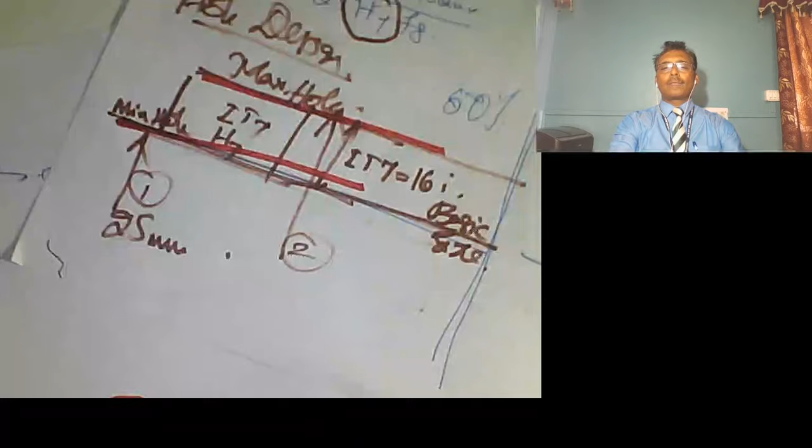I just showcase that. Can you see this? Yeah, look at this. So effortlessly they are moving from one slide, then see on the background they have a PPT. I was always doubting how these people are doing all these lectures.

There are two ways of live streaming lectures, please know this. One is direct live streaming on YouTube, wherein the flexibility is very limited - you can see my video or the presenter's video on full screen. It is quite useful for theoretical subjects where it is only one-way delivery, you don't need a PowerPoint presentation. It is only the discussion of some event, but at any given point of time, if you want to write something, you will get stuck in that.

Otherwise, you will have to go in the layman's way, write something on a sheet and hold it before a camera. It looks thoroughly unprofessional. So I was wondering how these online classes are being conducted. What is the way to do this?

For 7-8 days I worked on that, and this is now the final setup. While giving lectures, I can start working on this. I will discuss all these things whenever I want, come back to the drawing sheet, or go back to my PDF file.

Yeah, can you see this? Then I can showcase. Can you see? Yeah, now look at this. So all this is possible.

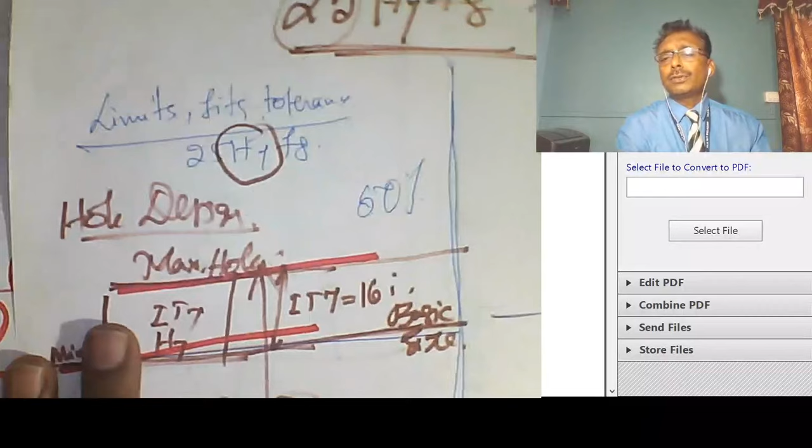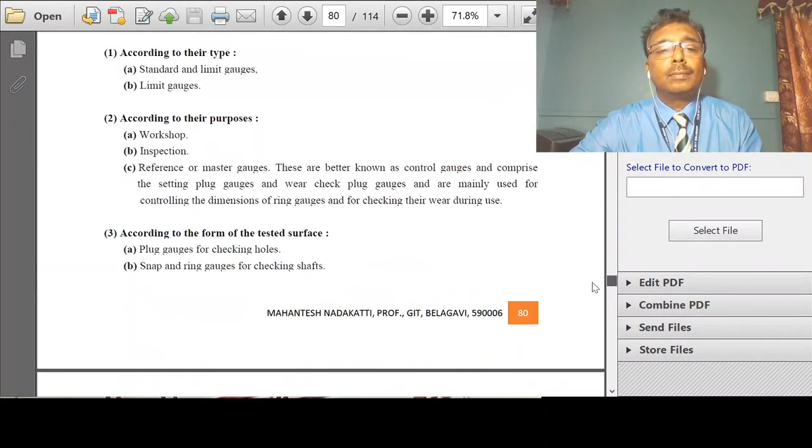Then, no, I want to go back to my PDF file. Good, so I can refer to the PDF file. Then I want to change - the same sheet is being seen, right? Let me change, can you see this? Okay, we are discussing the problem on gauges, let me go to the gauge section here. Can you see this? All this flexibility is available.

Now look at this, plain gauges. We are going to discuss about gauges now.

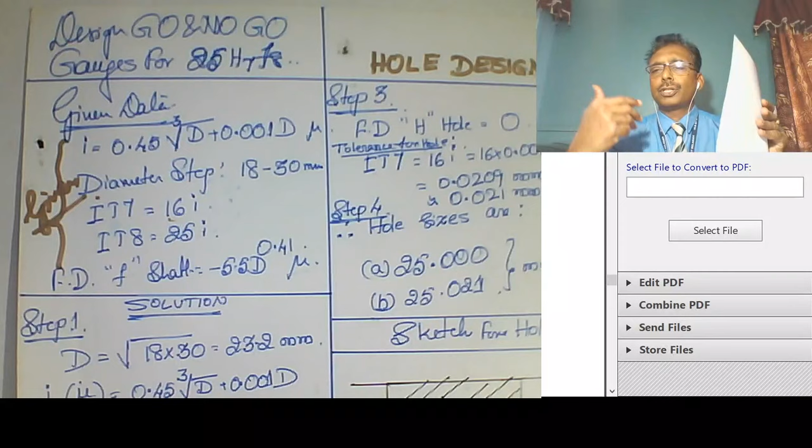Design of go and no-go gauge for 25H7F8. That's my today's topic. Yesterday also I started with the same. For the benefit of students joining us today, I will recap what was discussed, solve this problem halfway once more, then continue with today's lecture, but that will be quick.

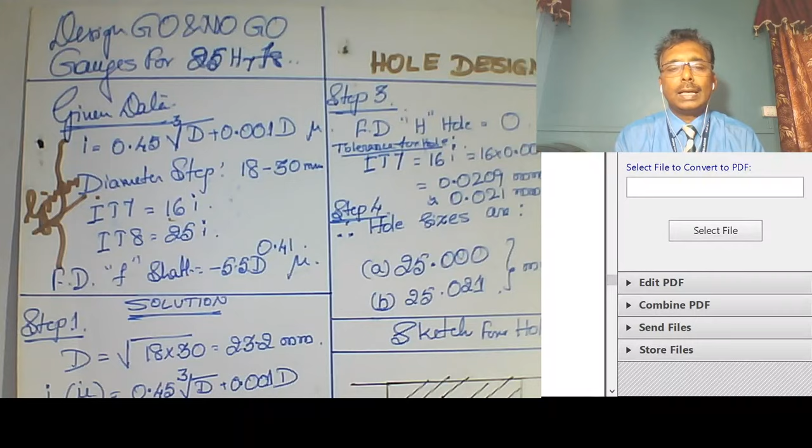Continuing with the gauge design problem, 25H7F8. Let us break this problem into two parts: one is limits, fits and tolerances problem, and another is gauge design problem. Now, from an examination point of view, what are the things needed?

Read the problem carefully. I have uploaded some numericals with you, you can go through the question papers and previous question papers. Go on my Google homepage, you will see previous question papers. I'll tell you the pattern of the question paper.

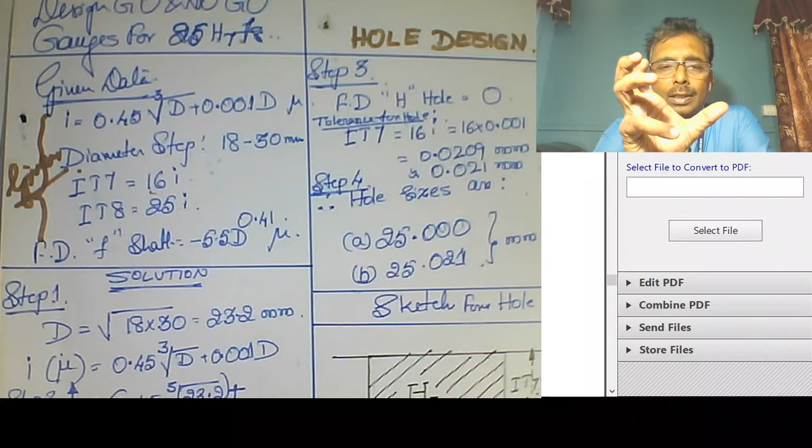Design limits and fit: design a hole and a shaft. The tolerances for hole and shaft for say size 25, 30, 35, 32, 33 -- that is the basic size. Hole letters A, B, C, D, E, F, G, H -- maybe H or G hole, G5 or H7; in this case it is H7. And shaft, small letter, F8, F4, A, B, C, D, E, F, G, H.

Okay, this is our XY line. I'll always hold it this way, this is a scale. Right from A to H hole, they lie above the XY line. This difference we call fundamental deviation. Let me write it for you with a sketch pen so it becomes easier. Can you see this? Okay, done, I will quickly review the nomenclature.

Now this is how we have to exercise: this is hole A, say this is D, this is H hole, this is say K hole, this is P hole, then this is Z hole. Can you see this? Z hole. This is called fundamental deviation. And for A to H holes, fundamental deviation is positive, FD is positive. Next.

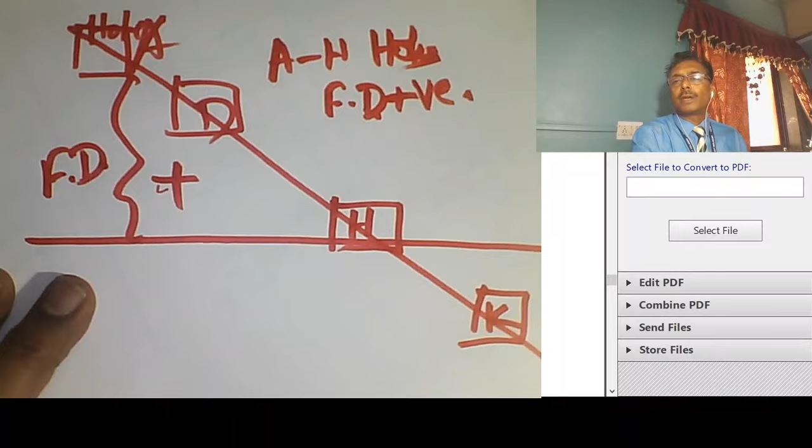Say something beyond H, J to Z -- fundamental deviation, and don't refer to J. K, L, M, N -- I can certainly say K to Z is negative deviation. This is fundamental deviation, FD. Okay, exactly opposite is the shaft case.

I think now it's clear. Okay, shaft nomenclature. See, this is A shaft, this is D shaft, this is H shaft.

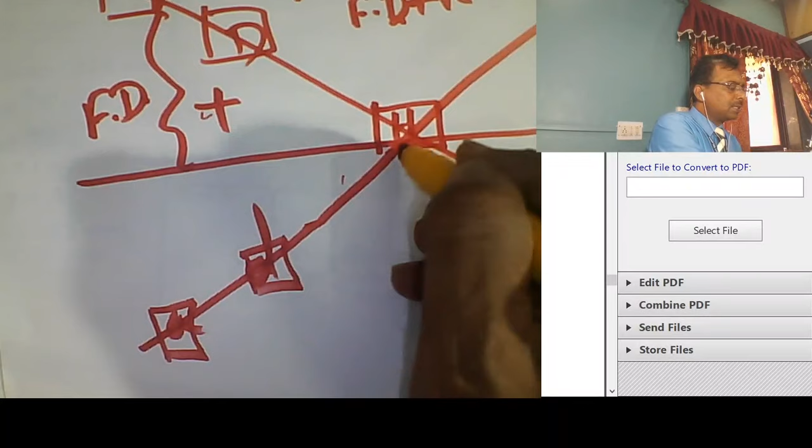This is negative fundamental deviation. FD is negative. Similarly, K shaft, small p shaft, small zc shaft, and this fundamental deviation here is positive.

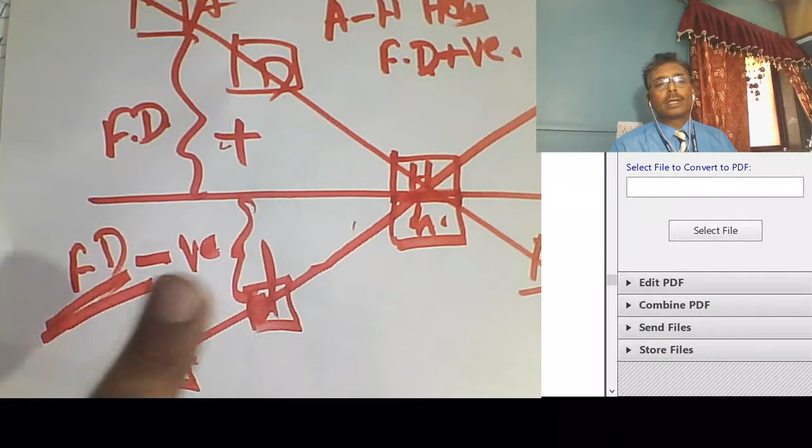Clear? This is positive, this is negative, A to H, small. But I'll separately draw for H. Just have a look. H hole and H shaft.

Their fundamental deviation is 0. Can you see this? They lie exactly on a basic line. This is our basic size. Basic size could be 50 mm phi, 45, whatever.

What is given? Say 30, in present case 25 diameter. This is in mm. The present example is 25 mm, which means that this size is 25 mm.

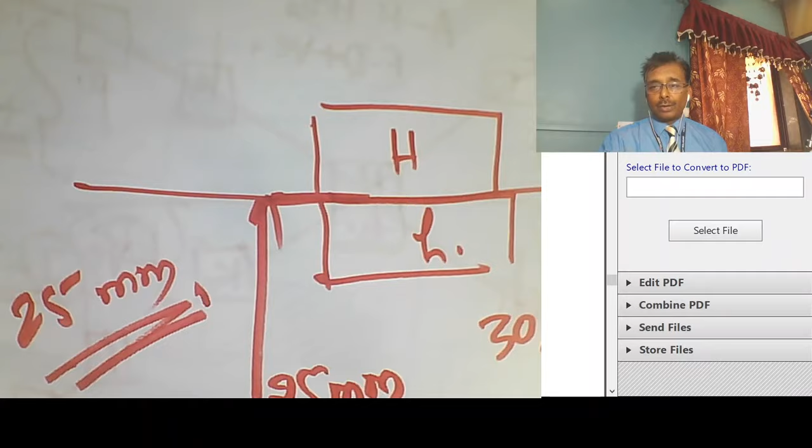I'll continue. Good, so now coming back to the numerical, 25 mm. As I said, H hole, H shaft. For H hole and H shaft, the fundamental deviation, that is the distance between this basic line and the minimum tolerance. So we need to understand the minimum and the maximum tolerances.

If this is the hole, say this is 25 D hole, let's say D4, which means that this basic size is 25. This difference is fundamental deviation. It corresponds to hole D. You will have some equation, minus, it is plus, this side is, can you see this plus? It is above the XY line. So you will get, I'll show you the equations, fundamental deviation equations.

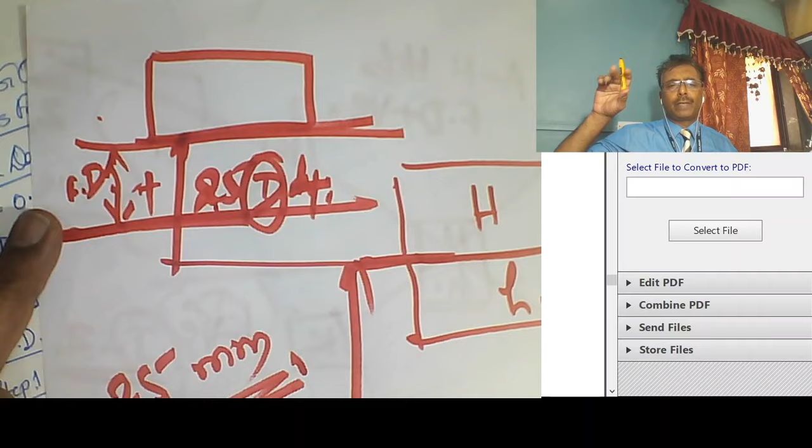Next, this corresponds to the IT grade. How much? In this case, it is 4. So IT4, how much is IT4? We have to find out. That will be given normally, 6i, 8i, 10i. I don't know how much is this, but I have to just check. That is given to you people. You don't have to remember.

Okay, this is the background of limits, fits, and tolerances. So come back.

Okay, 25 H7 F8. So the basic size is 25 mm. H hole with IT grade as 7, F shaft. The numerical in the examination will be given with this as the given data in the exam. i is equal to 0.45 cube root of D plus 0.001 D, it is in microns.

Mu is microns. Okay, next, it is better that you remember, it's a fundamental equation that anybody can remember. Don't expect this to be, if in the examination not given, you may not have to say that, sir, the data is insufficient or the equation is not given. Don't say that. i is equal to 0.45 cube root of, can you see this?

I equals 0.45 cube root of D plus 0.001 D, in microns, wherein the diameter is given in terms of mm. This D is called the nominal diameter. Nominal diameter is nothing but 18 to 30, that is a standard diametral step. These are also given but not necessary; the examiner may give it or may not give it.

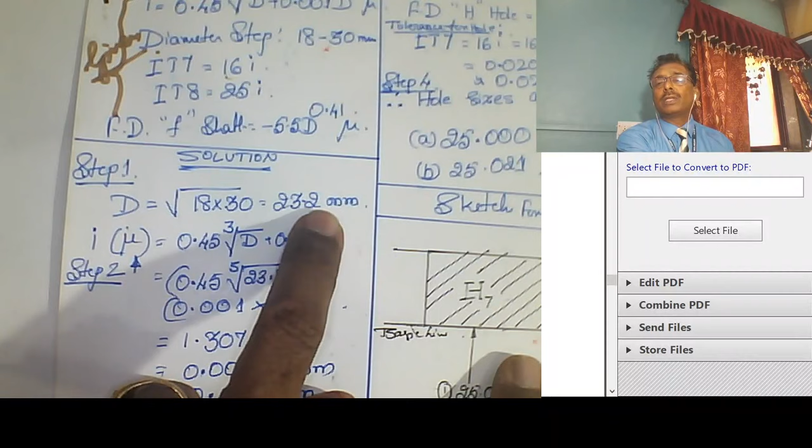Next, the I value: what you get here, D value is in mm, I equals 0.45 cube root of D. I equals 0.45 cube root of D plus 0.001 D, where D you substitute in terms of millimeters. So what you get here is in microns, 1.307 microns, which is nothing but 0.001 mm.

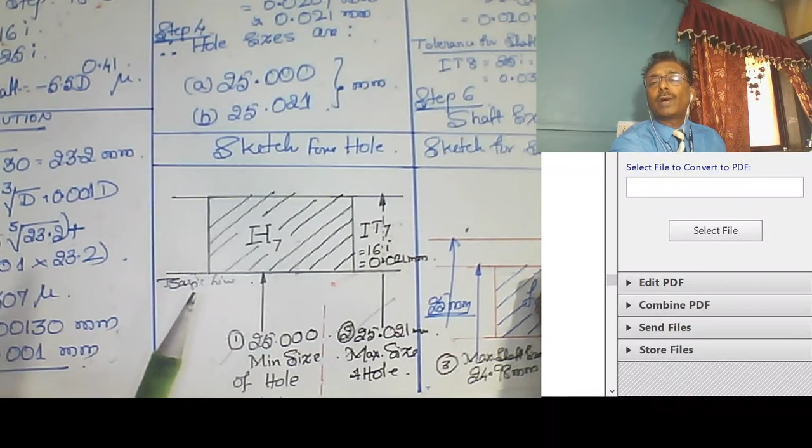This was discussed yesterday. Now, step number 3, hole design. Simple, draw the sketch. H7, write it. This is the basic size. We need to find out two values of the hole.

This is one size, this is the second size. I have mentioned 1, I have mentioned 2. First size is 25 mm, anyway it is given to you, and fundamental deviation for the H hole is 0. IT7, yes, it is given as 16i. The examiner has given you this; you don't have to remember it. IT7 equals 16i.

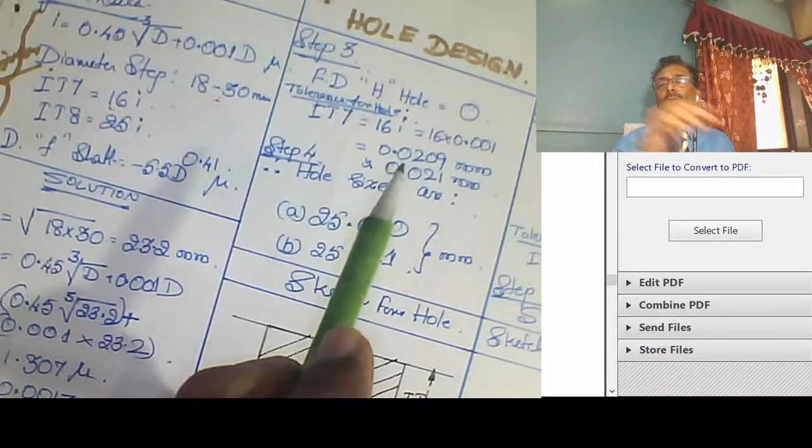16i is nothing but, we have found I: 16 into 0.001 mm, you get 0.021 mm. Next, the two values of the hole: just mention this 25. IT7 equals 16i, that is 0.021 mm, so the second value is 25.021. This is the minimum size of the hole, this is the maximum size of the hole, and both are positive values.

Next, shaft design. First, draw the shaft. F shaft lies below the XY line, right? I did discuss earlier, you can easily remember: keep this in mind, the XY line is the basic size. A to H hole, then J to Z hole — these are below the XY line.

Next, A to H shaft, along the XY line, these have negative fundamental deviation. Next, J to Z shafts, these have positive fundamental deviation. Keep this in mind. Now, it shows the F shaft.

F shaft stands for fundamental deviation as minus; it is on the negative side. I mentioned fundamental deviation as 0.020 mm, just below the basic size. Now we need to find the IT grade. IT grade for F8 is IT8. And what is the fundamental deviation?

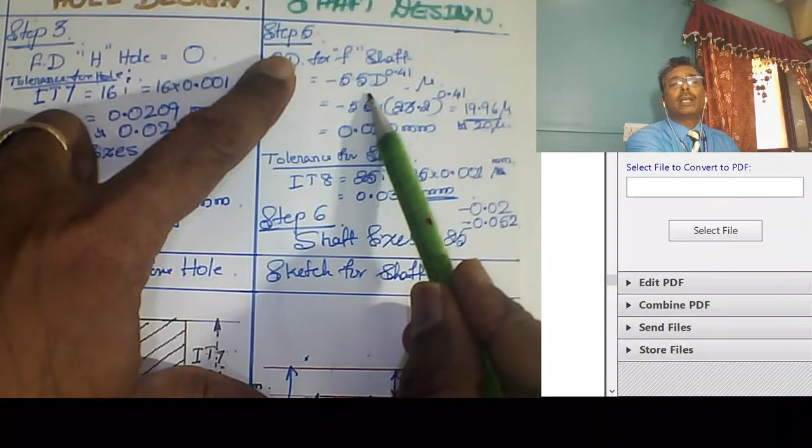For F shaft, fundamental deviation is given as minus 5.5 d to the power 0.41, minus 5.5 into 23.2 raised to 0.41, and the answer you get is in microns. Please note, you need to substitute diameter in millimeters and the answer you get is in microns — 0.020. This is where students tend to make a mistake: either bring it into millimeters or substitute in microns and mess up the units. Please don't do that; substitute in millimeters.

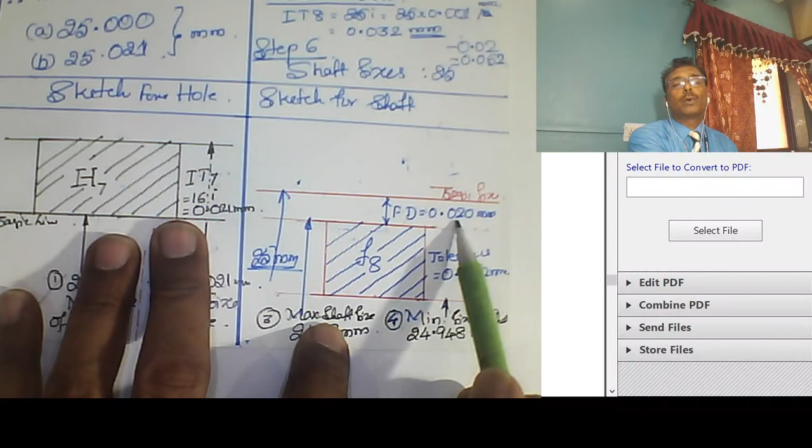This is in microns. Okay, tolerance for the shaft: this is 25 minus fundamental deviation, that is value number 3, and this is 25 minus fundamental deviation minus IT8. IT8 I have mentioned, IT8 equals 25i, 25 into 0.001, that is 0.032 mm. Finally you get 0.052. This plus this is 0.052, 0.02, 0.03, 0.5. So that means this is 24.948.

How did you get this? 25 minus this minus this. Okay, that completes the first half of the portion which I discussed yesterday.

Let us get going with gauge design today. I will discuss a very simple step of designing the gauge. Okay, please give me some time.

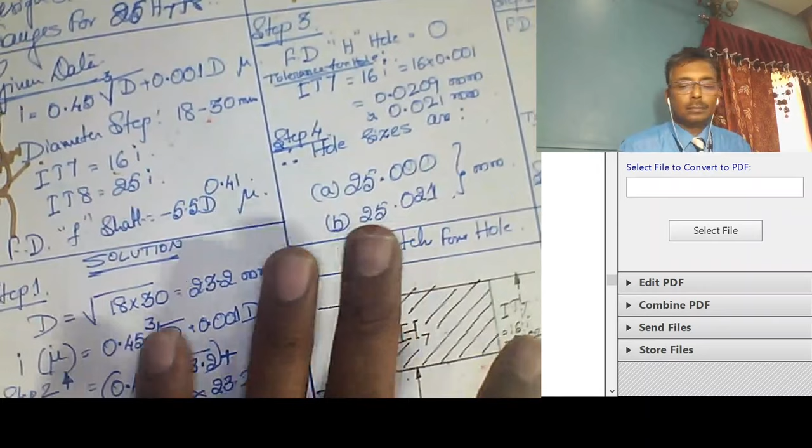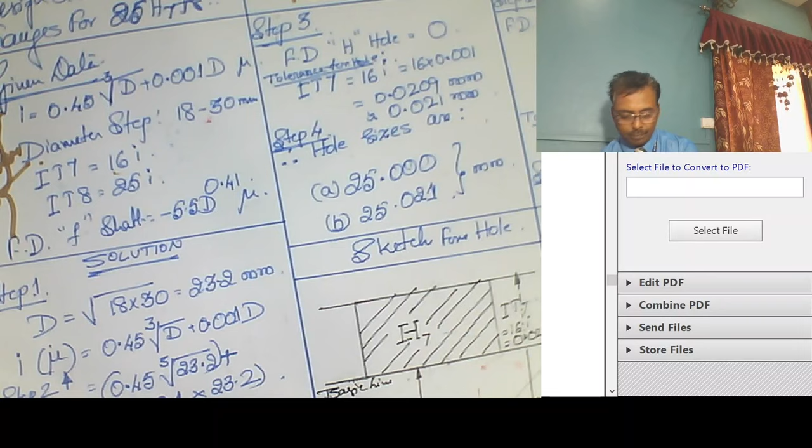One sec. I'm trying to locate one drawing sheet. I think I misplaced it somewhere. Just a minute.

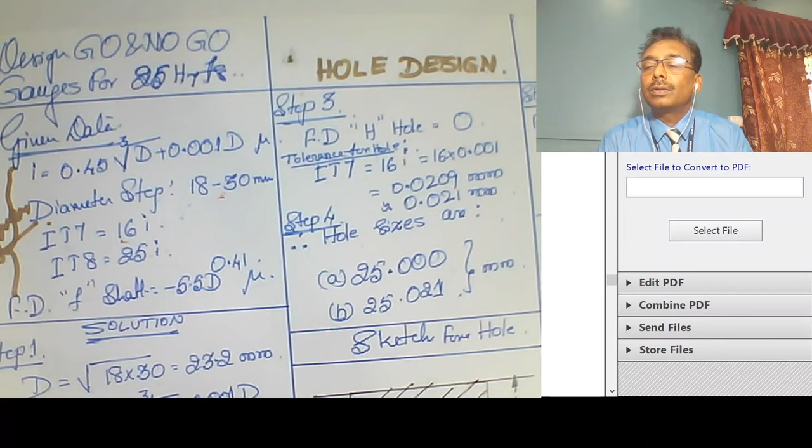Let me see how many have joined us. 14. Who is this? Santosh. Continue, wait, just a minute Santosh. Guruling KST, yeah, who is this? Hello Guruling, I think things are going on. 14 views, just give me some time, hold on for a moment, I'm trying to locate one sheet. Okay.

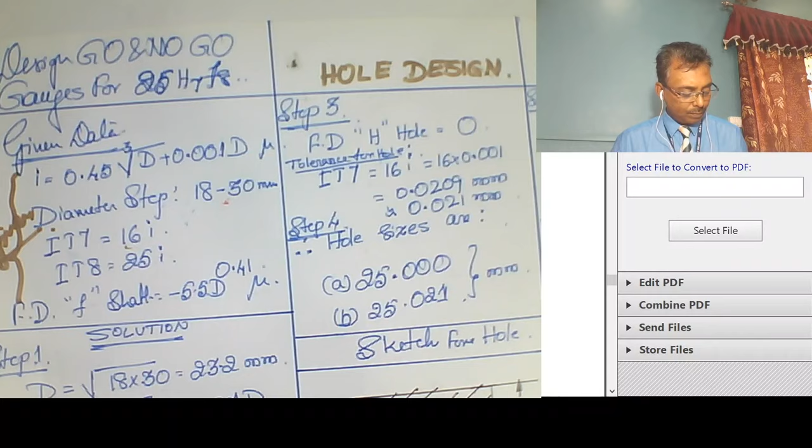No, I think I'll have to solve it again. Never mind. Just a minute. I will showcase this entire thing once more. Probably I will have to do the drawing sheet. Okay.

Let us get going with the solution of the gauge design. Can you see this, all of you? Okay, give me some time please. I'm trying to show you the way how gauge is to be designed.

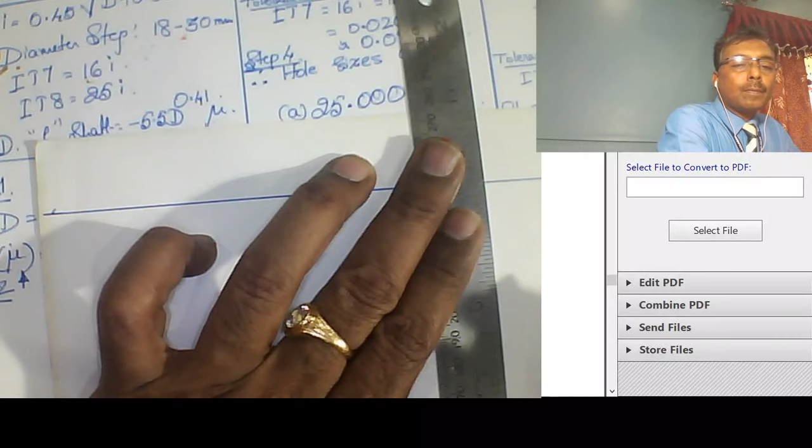Gauge design consists of two parts, go and no go gauge. Let me also keep this as a reference. One is go gauge, another is no go gauge. Let me increase the zoom size. One sec. Can you see this? One second, just hold on.

Sure, okay, I think this is visible now, right? Is it visible? This drawing sheet, is it visible now? Just please check. Let me just check. Okay. Can you see this? I think it's okay, you're able to view this.

Okay, good. Next, so we'll have two parts. One is gauge design for hole, another is gauge design for shaft.

So now gauge design for 25H7, that is hole. For hole we need a ring gauge, plug gauge. If you want to check this hole, I have to fix a plug gauge, and one is a go plug gauge, another is no go plug gauge. So there are two dimensions that I need to find.

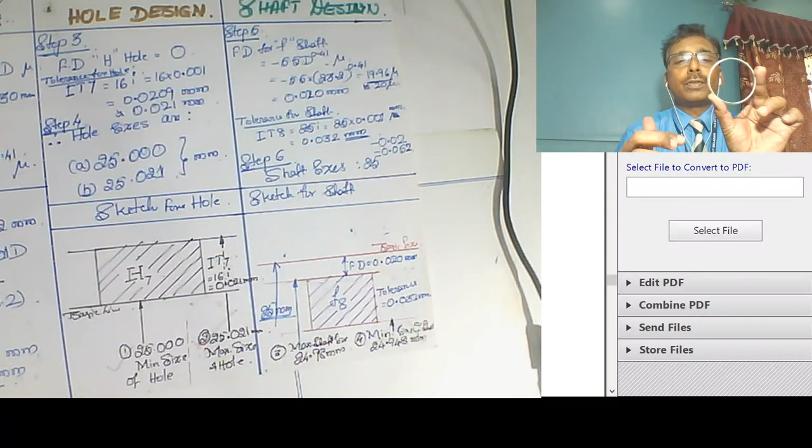And for shaft, 10% of 0.032 mm. Can you hear? Did you understand? Gauge tolerance, supposing if this is the gauge. Let me, I think I have some mechanism here. Supposing this is the gauge. Because of repeated use of this gauge, this tends to wear out, so this wear allowance is given as 10%.

Supposing this is being checked as a go gauge for certain hole, this is a ring gauge. I want to just check a shaft, whether it is passing through or not, right? So this is given as 10% of the tolerance for hole, and similarly for shaft it is 10% of the shaft tolerance. Now, with respect to this, 0.021 mm is tolerance on the hole side. So what should be the ring gauge tolerance? It should be 0.0021 mm.

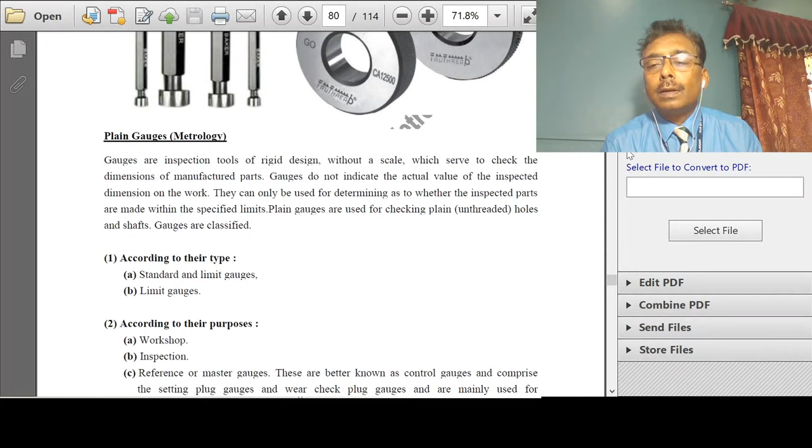Okay, with that as background, let me just check my PDF file. One sec, please hold on. Just hold on. 25H7 F8, okay. I got directly the values, I will show them here.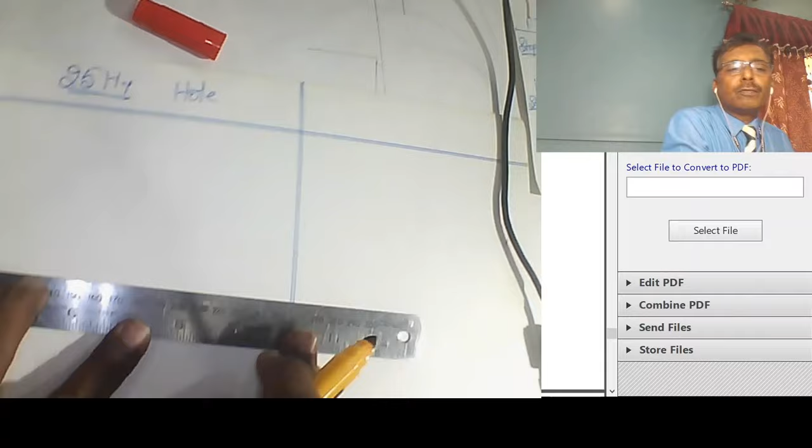Okay, 25H7 hole. Now here I want you to put more concentration. I'll put a very simple way of solving. Don't worry about positive side, negative side, fundamental deviation, whether to be added, whether to be deleted, nothing. Just follow my steps as far as hole design and gauge design for hole and shaft is concerned. I'll try to draw with sketch pens. So now, straight away, is it visible? This is visible, right? Okay.

Now, this is hole, H7 hole. We have already found out its value as 0.021 mm. And this is 25, this is 25.021. Obviously, 25.021. Okay, now we need to design the gauge for this.

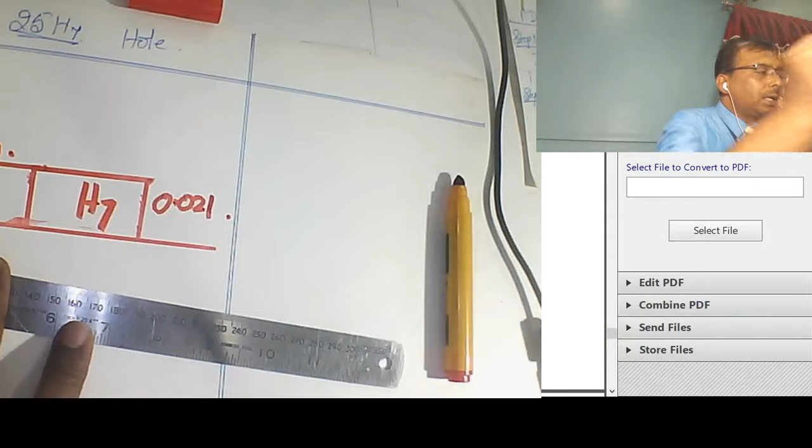Two parts, one is go gauge, another is no go gauge. I will draw it with another pen for simplicity. I will mark it here, I will mark it on this side. Is it visible? Others can please let me know your view. Santosh, is it visible? Drawing sheet, is it visible?

Drawing sheets. Otherwise, I'll have to zoom in. I'm waiting for your response. Is it okay, or should I reduce the zoom size? Should I change the zoom size? Let me just check what is your feedback. Visible, sir. Okay, good. Thanks, Ashish. Thanks, Epic. Okay, next, where is this?

Right, okay, so now I will draw it with another pen and a pencil. If you follow this step easily, I am pretty sure those of you who attended this lecture will be able to solve any problem associated with limits, fits and tolerance. That much guarantee I can give you. Next, same thing, I am continuing here. Next, I am just drawing these limits of hole. This was our hole, this is the hole. Okay, now

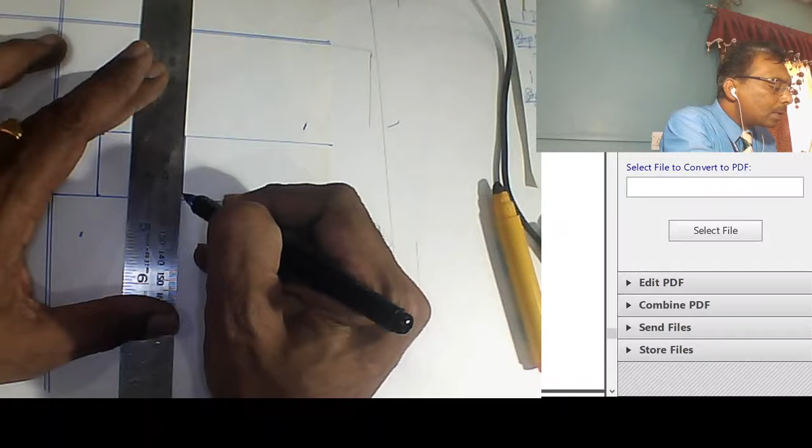All you need to do is, for go and no go gauge, just draw two rectangles here next to this. I just follow this step. Two rectangles. Okay, one, then another same size rectangle here. Same size rectangle. Can you see this? Okay, I'll show you once again, don't worry. Both should be of the same size. Okay.

This size is... okay, I think this pen is not visible. This is 0.021, right? 0.021. How much should be this? Obviously this is 0.0021, and same 0.0021 here. All the values, please keep them in mm.

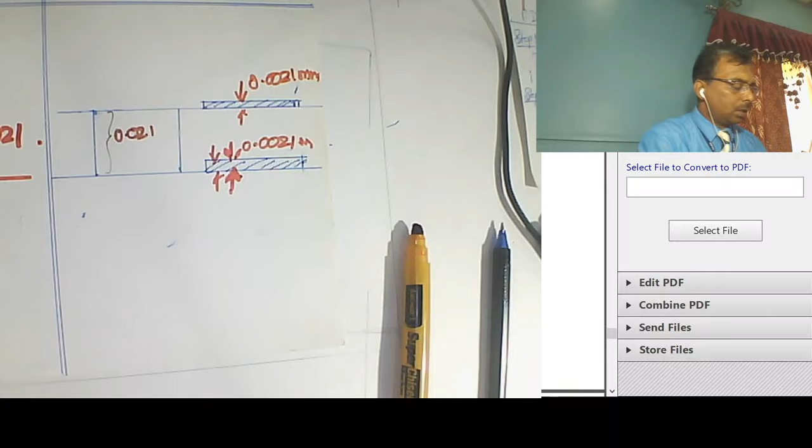So far clear? Okay, now all you need to do is write one as go gauge. This is go, this is no go. That's all. Got it? One is go, another is no go.

Step 5, next step, that is plug gauge design for hole. All you need to do is draw two parallel lines. One sec. Okay, sorry, yeah.

I'll write here, gauge tolerance is equal to 10% of hole tolerance. This is gauge tolerance is 10% of hole tolerance value, or shaft tolerance value, either ways is okay. Hole tolerance value in this case is 0.021, so this is 0.0021.

Okay, next part, what we have to find out here? 4 values, 1, 2, 3, 4. I'll mark the 4 values here, you try to follow them mechanically. There is no mathematics, no computation, no integration, no differentiation. Straight away it is 4 values that you have to find out, of which 2 are already known to us. Okay, what are those 4 values?

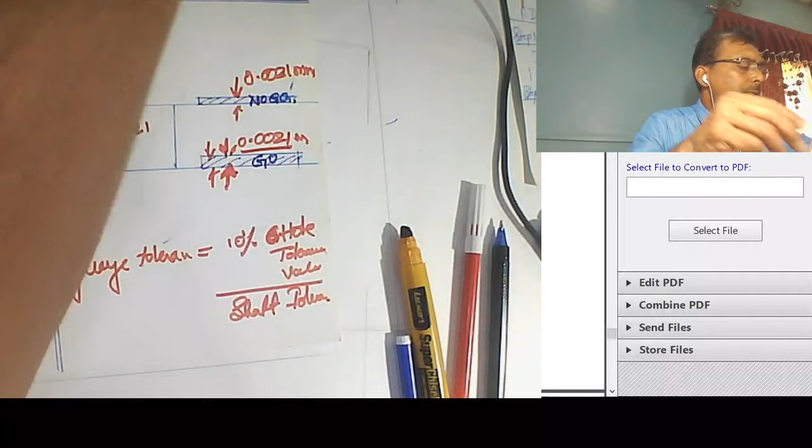1, 2, 3, and the last one is top portion 4. Got it? 2 values of go: lower limit of the go, higher limit of the go. 2 values of no go: lower limit, upper limit of the no go, out of which 2 are known to us. What are the 2 values known to us?

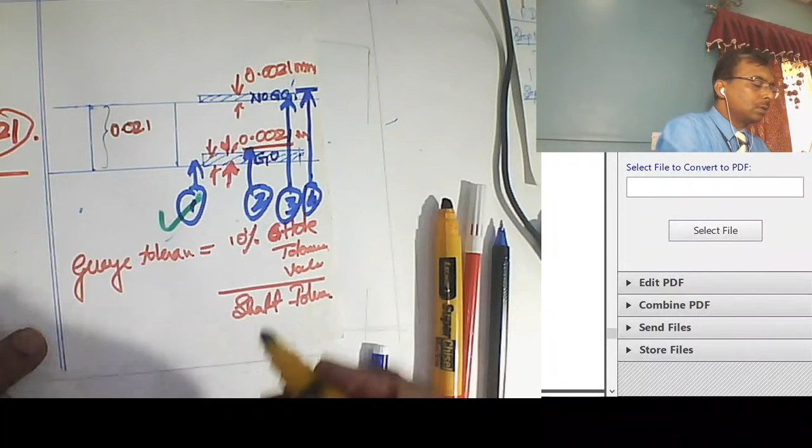Look at this. 1 is known to us, 3 is known to us. Yes or no? 1 is nothing but lower value of the hole, 3 is nothing but upper value of the hole. So 2 are known, another 2 we have to find out. How should we find out?

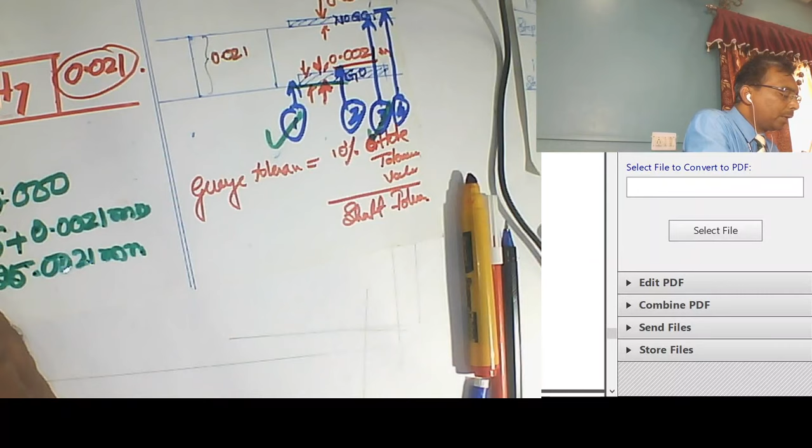Simple, look at this. This is 25. I have written here, okay. Go gauge: one value is 25.000. Second value is 25 plus 0.0021, right? 0.0021, is it difficult? That is nothing but 25.0021 mm. So this is go value, go limits. That's all, one part is over already.

Look, go limits. One size is 25, another is 25.0021. How did you get 25.0021? How did you get 0.0021? That is nothing but 10% of 0.021. And this 0.021 is nothing but IT value, IT7, IT8, IT10, right up till IT16.

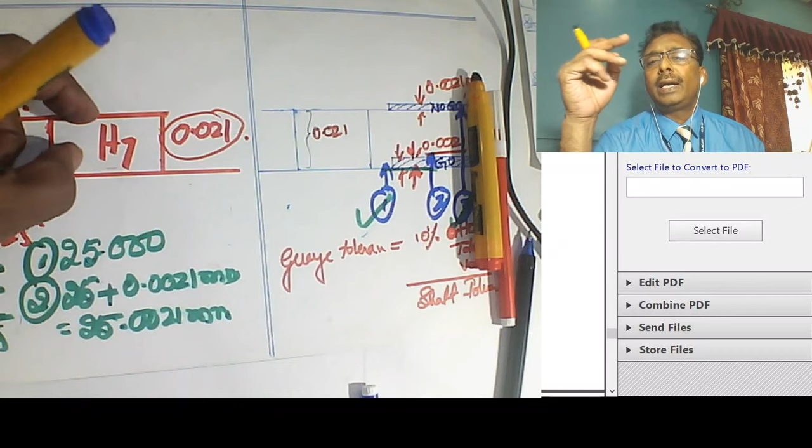IT7 represents something like, you should be able to tell me now whether it is a smooth finish, rough finish, what kind of operation it must have been done with. Probably this is something done with either milling or lathe. If you go H8, somebody asking if it is H9, what kind of operation? It could be drilling operation. And if it is mentioned H12, H14, H15, it should be some pressing, blanking. H16 would represent casting, that will have 1000 I.

So that means high tolerance. That means this size will be bigger here. Of course, it is in micron level. Even if it is more or less, it will always vary in terms of micron level.

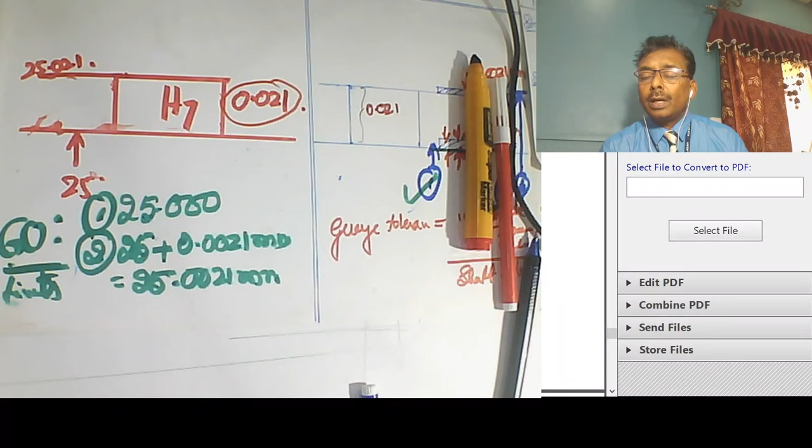Okay, coming back to 1, 2. Did you understand? 25.000, 25.0021. I think now the time is, how much is this? Time is 10:49. Okay, I have another... yeah, another 10-15 minutes.

I should be able to wind up this part. Okay, now I want to find out 3 and 4, out of which 3 is known to us, only 4th is to be found out. Okay, go gauge, no go gauge. Sorry, let me use the other color. Go gauge, no go gauge.

No go gauge, one value is this. This one, 3rd, can you see this? 3rd, this size. So how much is that? 23.021. Yes or no? 23.021. Okay, what is the other value?

Simple, this is value number 3, value number 4. 4 is, sorry, not 23. How much is this? 25. 25.021. Next, 25.021 plus 0.0021, this part, 0.0021. Got it? I think you will get something like this value.

How much is that? Let me just check how much is the value I'm going to get. Can anybody tell me? Let me just check, please give me time. How much is the value here? Yeah, 25.00... 25.021 plus 0.0021... 25.023. This value is nothing but 25.023, that's all.

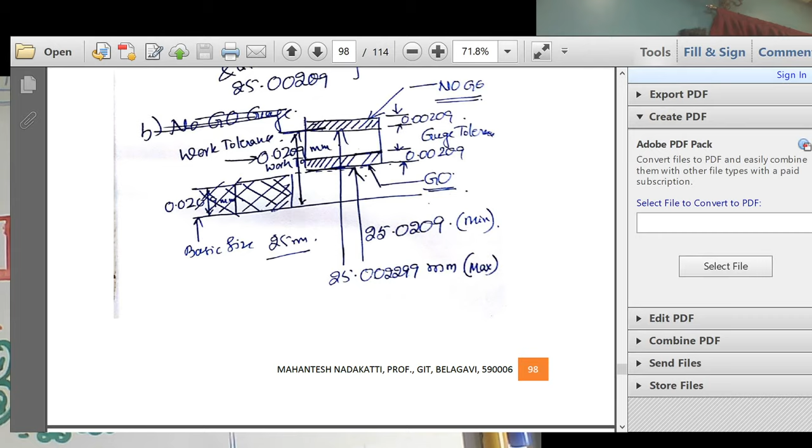Okay, good. So now, can you see these values? I have mentioned here 0.02, same thing. Go here, no go, and 0.00209, and it's 0.003, you can mention this one. So this is nothing but your gauge tolerance. Now let me move this, all the 4 values are mentioned. I have reached up till 4th or 5th decimal, but you can reach only 4 decimals. No go gauge I have mentioned here.

Let us come back to this. One sec, just hold on. What happened to our drawing sheet? Okay.

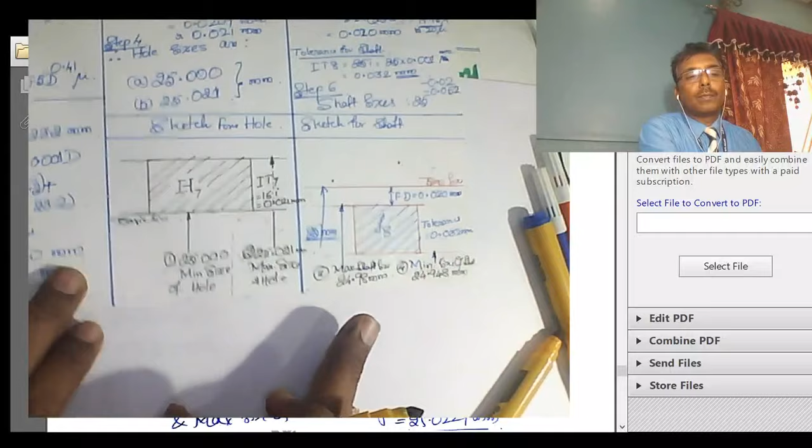Right, so I'll just quick recap all the 4 values. This is the hole. H is 7. Just for your reference, I'll show this. H is 7. Draw another 2 lines, make these 2 parallel lines. Okay, I just made it larger size.

Write this as go. This is go, this is no go. Okay, now this is 10%, this is 10%, 10% of this value, and this value is 0.021 mm. So that means this is 0.0021 mm. This is also 0.0021 mm.

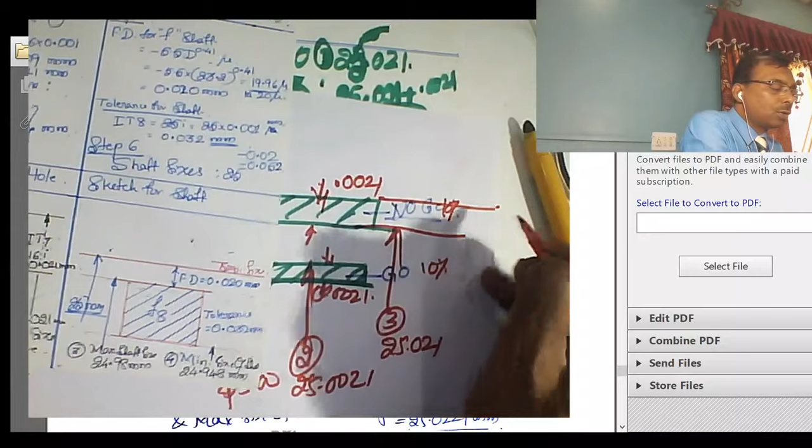So now, this is 25 of course, 25. So this is, first one is 25.00, second one is 25.0021, next third one is already known 25.021, 25.021, and this is the fourth value, 25 point, how much is that? 25.023, 023, that's all are in mm. 25.023. Please calculate this at home. After that you should be able to get the answers, not a problem.

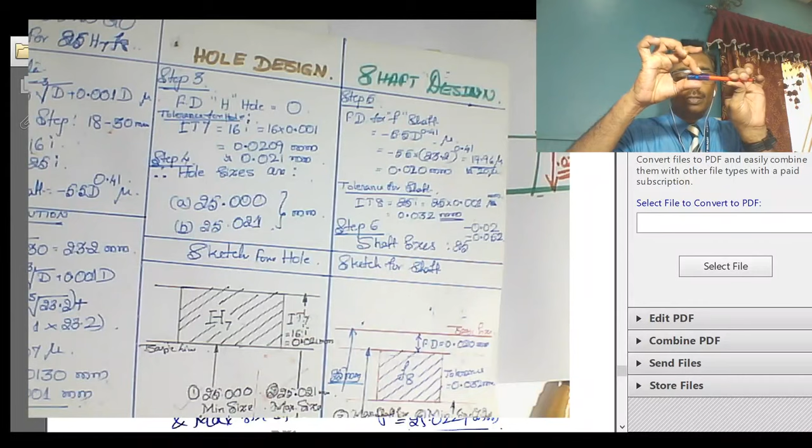Now if this is over, half the portion is over. Next comes, for the shaft we need to design ring gauge. If this is the shaft, we need to design a plug gauge, right? For shaft, ring gauge, let me say this is the ring. This is the ring, one is go ring gauge, another is no go ring gauge. Procedure remains the same, direction will change.

Let me go back, let me see how many are online now. 12 students are online, who is this? Pratik, visible sir, okay good. So 14 likes, that looks good. I expected more students, but nevertheless, shaft design now.

Okay, shaft design is over. For the shaft, we need to design the go and no go ring gauge, go gauge and no go gauge. Procedure will remain the same. I will show you on drawing sheet. Okay.

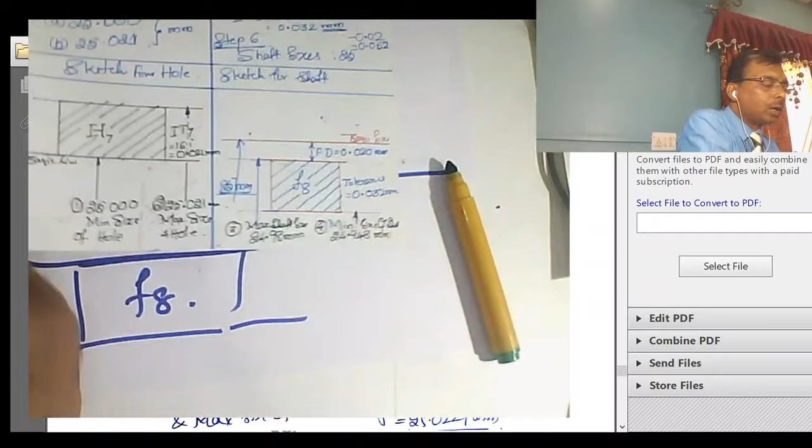Can you see this? Okay. This is F8, what is that? F8. Already we have found out these sizes. These sizes are found out to be, how much of those? Can you see here? I'll just write these sizes. This is 24.98, this size is, can you see? Okay. 24.98, it's already found out. And this is also found out, right?

This size, 24.948. 24.948. This value is less, this value is more, because this is towards, this is minus side, this is the lower deviation of the shaft, this is lower deviation of the shaft, this is upper deviation of the shaft. Okay, this is maximum metal condition, this is minimum metal condition.

If a shaft is given something smaller than this, say 24.8, 24.9, then the shaft gets rejected. If you are given a shaft which is more than 24.98, you can still work on that, you can get the price reduced, or you can send it back to the manufacturer, he can rework that and he can sell it to you, come back. But if the value given, if the shaft given is less than 24.948, straight away it goes for rejection. Entire work is lost, or the material is lost, wastage.

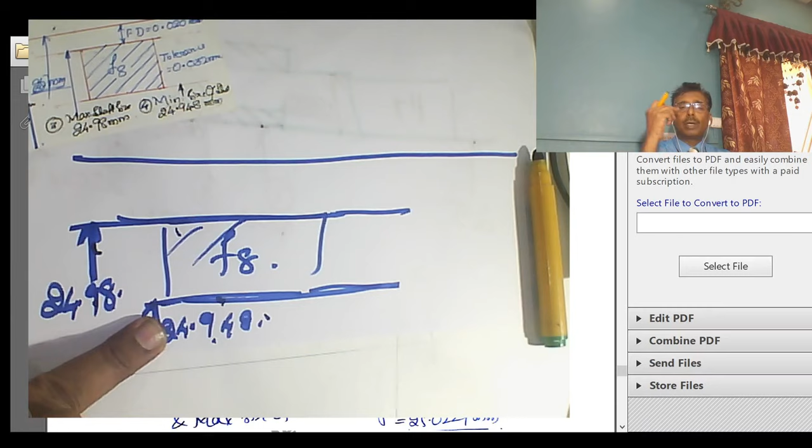Next, we need to design the plug gauge. Simple, step number 5 and 6, 4 values. I'll show you here, follow that mechanically, straight away, mechanical. Okay, I'll show you with another drawing, another pen. All you need to do is just draw 2 lines below this. Okay, earlier we were drawing it for hole, it was above this, right? Here, can you see? For hole, it was above the line, here also above basic line, but for shaft, it is

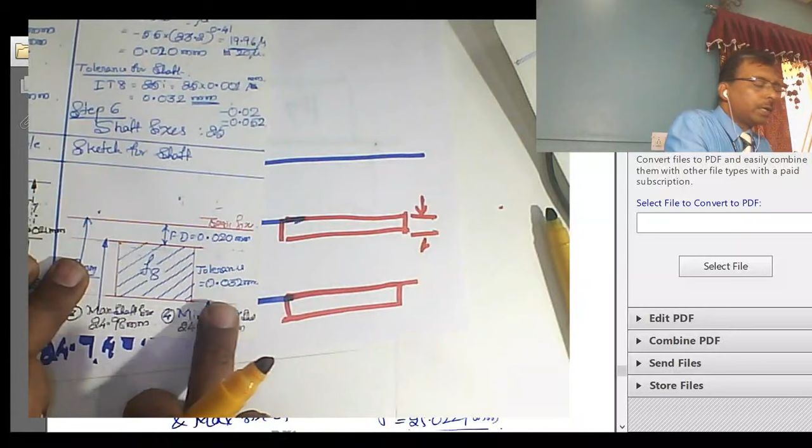below the line. That's the only difference. But the distance will remain the same. How much was this? This was for shaft, can you see? 0.032, can you see it? Okay, so this is 0.032. So that means this will be 0.0032 mm. Always don't forget, it is in mm. 10% of this value, 10%. This is called gauge tolerance. Gauge tolerance, okay, this is gauge tolerance. Exactly the same gauge tolerance you have to give on this side. Okay.

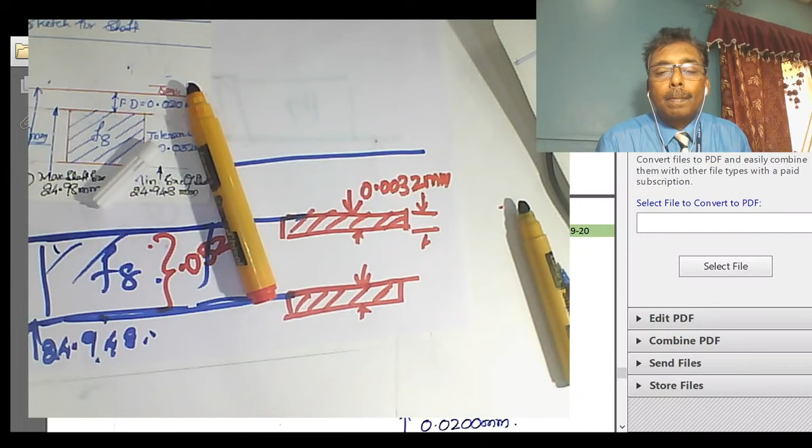Now, the change here is the top part becomes go gauge, the bottom part becomes no go gauge. This is go gauge for shaft, this is no go gauge for shaft. Is that clear? This is go, this is no go. Difference between hole and shaft: for hole it's a ring gauge, for this it's a plug gauge. In case of hole, the tolerance was taken above basic size, and above this size. This is no go, this is go.

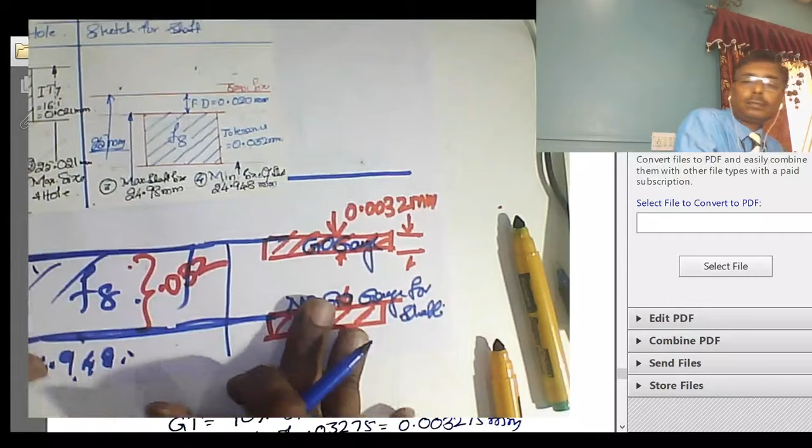Here, in this case, just below the XY line, this is no go gauge, this is no go gauge. Now what are the values that we need to find out? Another 4 values. Can you say this? 5, 6, 7 and 8. If you find out these values, 2 values for go gauge, 2 values for no go gauge, the problem gets 100% over. Now out of these 4, already 2 are known to us.

What are the known values? Have a look, this is known, 5 is known. 5 is this value, we have already found out. Next, 7 is also known, that is 24.948. Here it is, here it is. So 5 is known, 7 is known. You have to find out only 6 and 8.

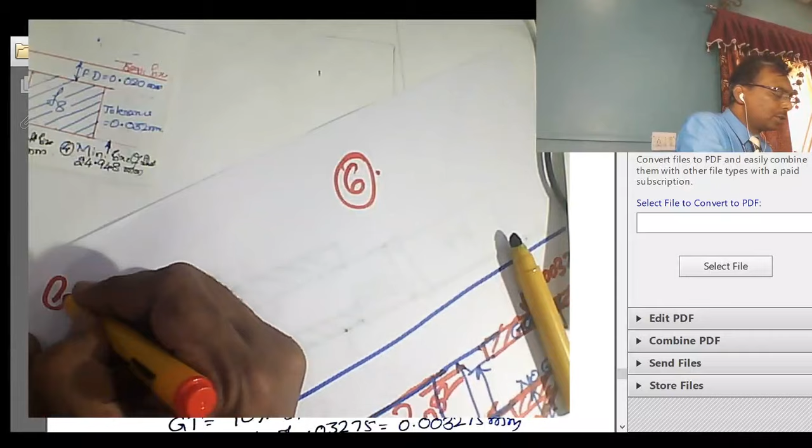Value number 6, this is go gauge for shaft. Go gauge for shaft, 5 and 6. 5 is 24.98, 6 is 24.98 minus this value, minus 0.0032. That's all. How much is that? 24.98 minus 0.0032 equals 24.97.

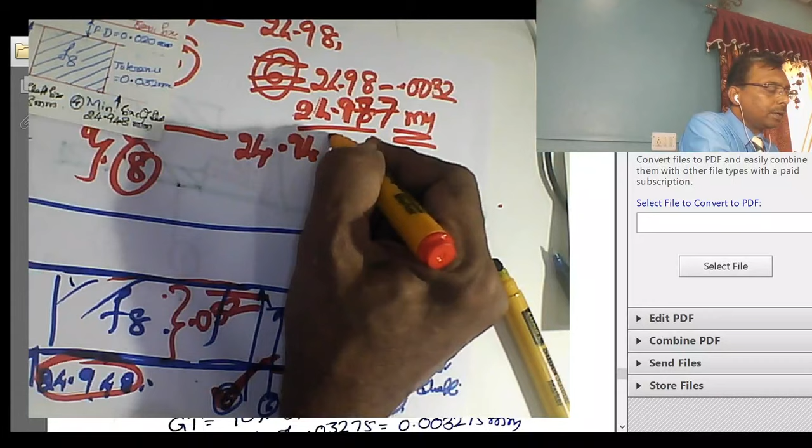24.9768 mm. Next, no go gauge for shaft is nothing but 7 and 8. 7 is known already, 7 is 24.948 mm. Next, 8th value is 24.948 minus this value. So this is go gauge, this is no go gauge. 24 point so and so minus this value, 0.0032. How much is that? 24.948 minus 0.0032, that is 24.945 mm. That's all.

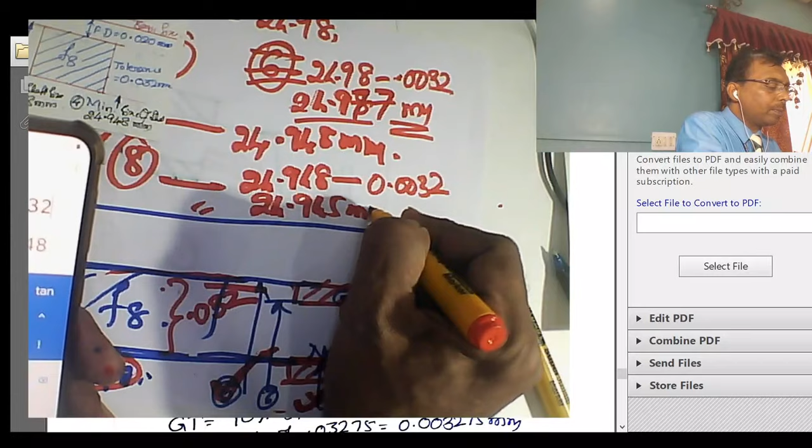Done, 8 values. 8 values of go and no go gauges for plug and shaft.

I will recollect everything right from the beginning.

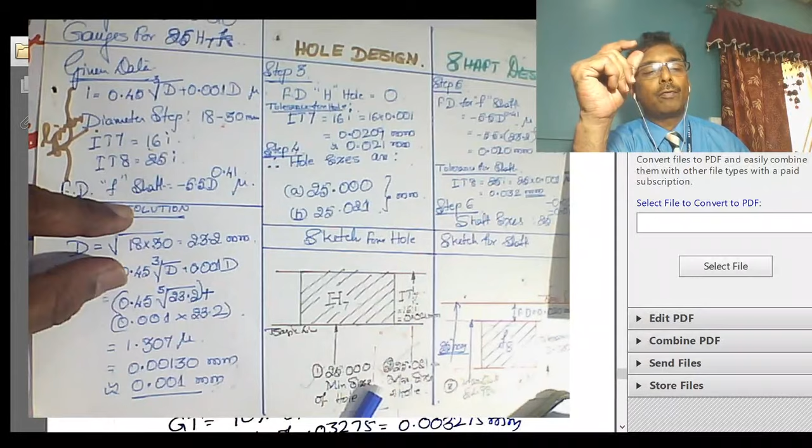Next, hole design. One is basic size, another is H7, IT7, find out this. So you get 2 values of hole, 1 and 2. Next, 2 values of shaft, 3 and 4. Value number 3, value number 4. This is third, this is fourth.

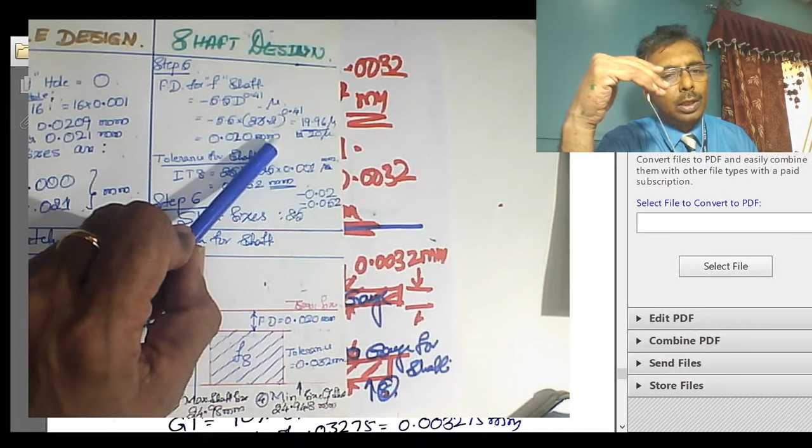How did you get it? This is fundamental deviation, this is already given. This equation is given, fundamental deviation is given by the examiner. So you can find out, and the only thing here is the answer you get is in microns, convert that into millimeters. Please see that you write the values in the drawing, it becomes much simpler. Once you have written all these things, you don't require the numerical.

All you need is straight away the next hole design and the shaft design. Hole and the shaft design could be done by using a drawing sheet. Quick way of drawing, entire thing I will draw in one sheet, both for hole and the shaft. Follow me in this aspect carefully. In one single drawing I will write down everything. I think it should be easier.

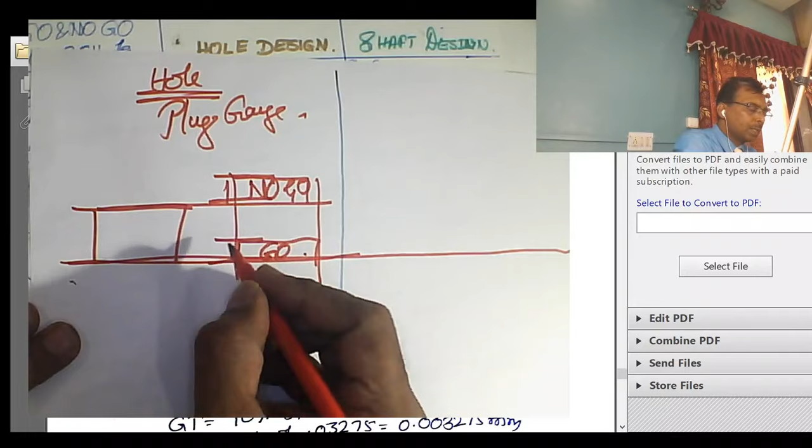Okay, hole, simple, extend the line, make 2 lines here, make 2 lines here. This is no go, this is go. That is, for holes you use plug gauges. These are for hole, use plug gauge. Here we need to find out 2 values of go gauge, 2 values of no go gauge. I'll write down in another color. Go value, no go value. So go value, I think this is not working.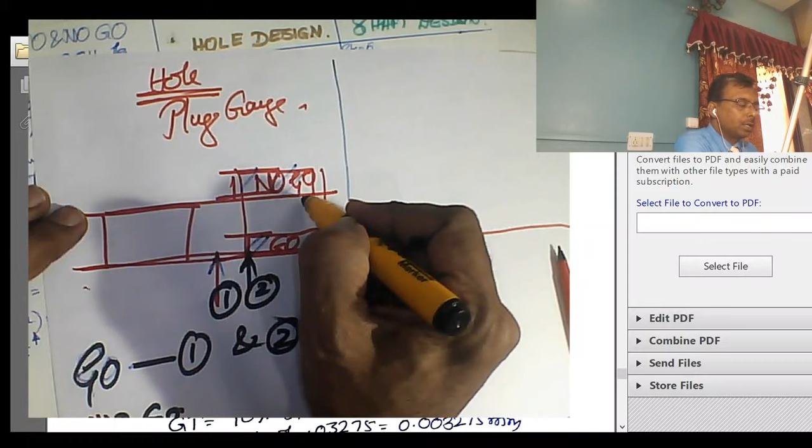Go value number 1 and number 2. This is 1. Next, no go plug gauge, no go plug gauge number 3. Can you see? Okay, number 3, then number 4. So 1, 2, 3 and 4.

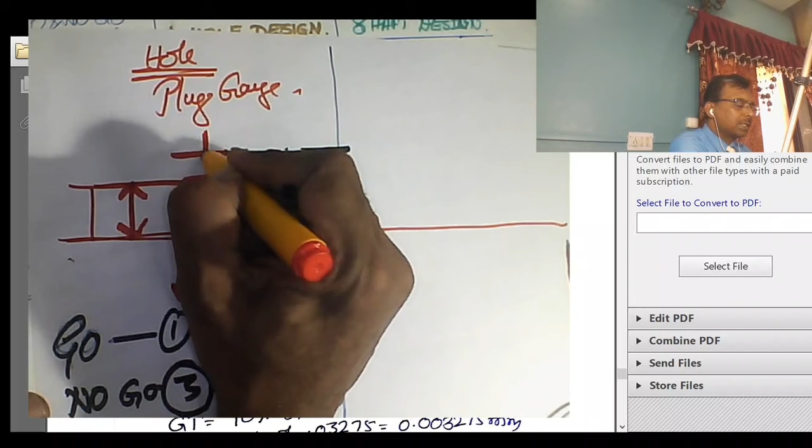Out of which, please note, we know 1, we know 3. Already we know this, this part is known, this part is known. So these two, 1 and 3, are known. We need to find out 2 and 4. That can be found out. Once you know this, you can find out this. This is 10% size, 10%. Okay, we can find out all the remaining.

So 1, 2, 3, 4, two values of go, two values of no go. For hole is over. Now for shaft, we use ring gauge. Ring gauge. Let me draw the shaft for you, a simple sketch.

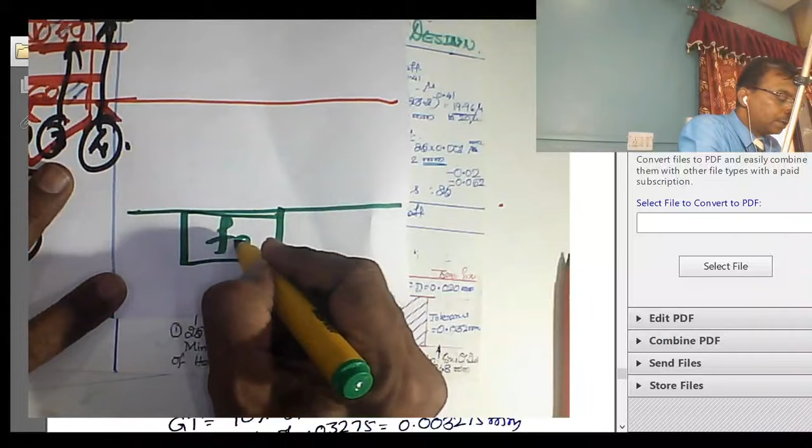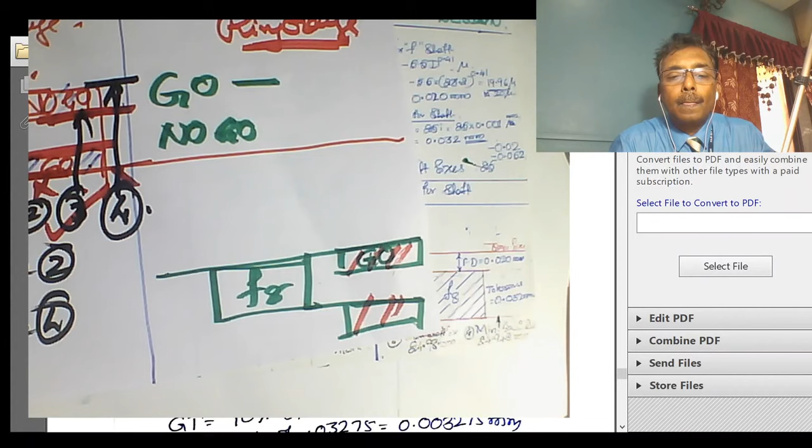Now for ring gauge, again go ring gauge, no go ring gauge. For go ring gauge, this is go. One sec. This is no go. This is go. This is no go. Okay.

How many values do you have to find out? 2 values here, 2 values here. So let me mark them. 4, 1, 2, 3, 4 are over. 5, 6, 7, and last one 8. Clear?

5, 6, 7 and 8. Two values of go, two values of no go. No go. This is go, this is no go. Okay.

I had drawn this actually in this way, but in this mess up I don't know where I lost that card. I wanted to showcase that card for you people. I lost that. Nevertheless, this is fine. You please solve it by yourselves.

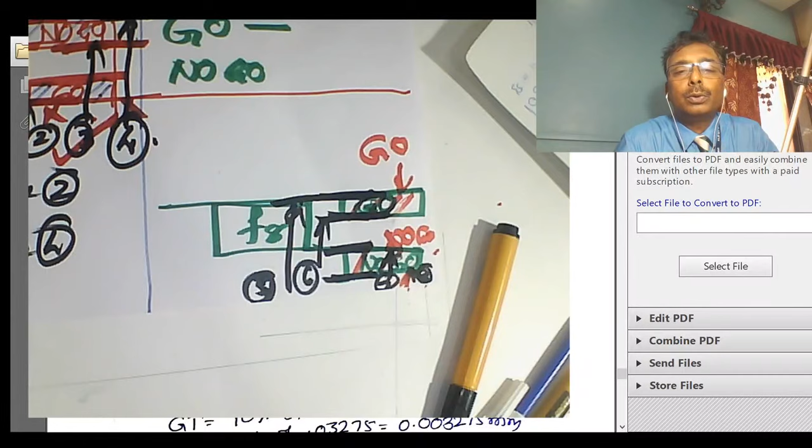It is also uploaded. Can you see here the values? I'll show you, wait. Just a minute. Yeah, can you see this? Can you see these values? Basic size and then wear allowance, okay, and then minus 00.

All those values you can find out here, and you can start solving the problem. There is some, I think there is a mistake here. I will fix that later. If there is a mistake, I'll just rectify that. I think I am right. We'll follow this.

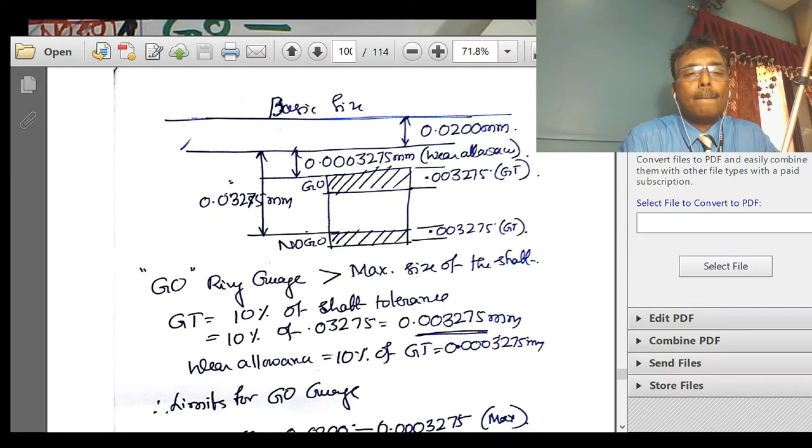Okay, so 8 values. Finally, come back to this main sheet. Design, go and no-go gauge, 25H7f8. First half: design of hole and design of shaft. Second half: design of plug gauge. For hole you need to have plug gauge. For shaft you need to have ring gauge. So design of plug gauge and design of ring gauge.

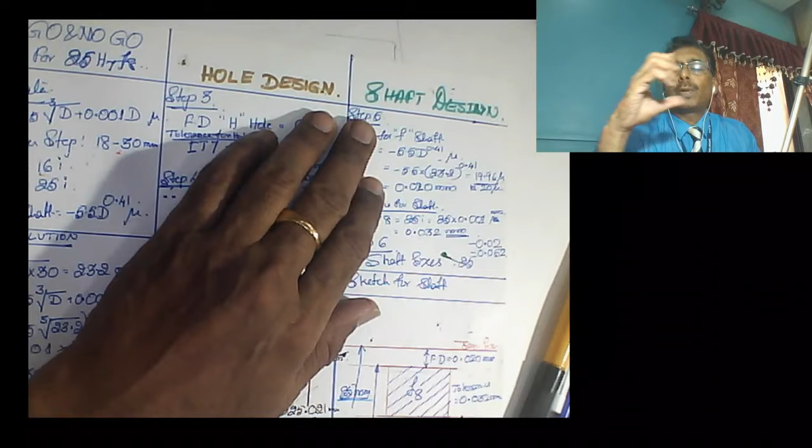In the design of plug gauge you have go and no go gauge, and for the shaft you need to have a ring gauge, go ring gauge and no go ring gauge. So in this case there are no go and this is go. So 2 values of go, 2 values of no go. Next 2 values of go, 2 values of no go for shaft.

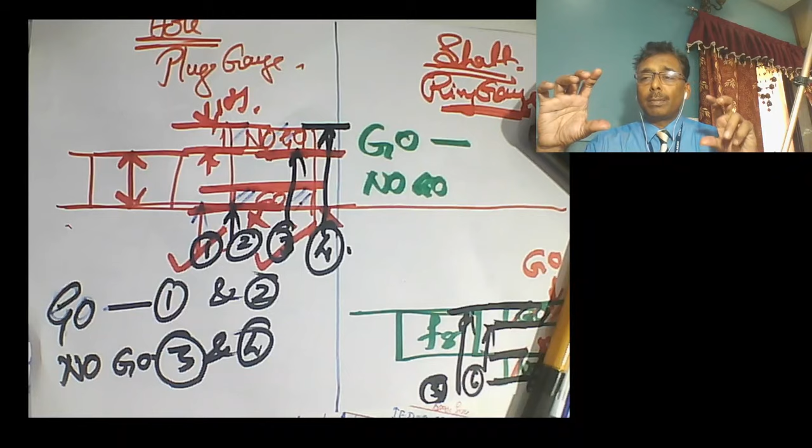Please remember, we don't have books here. Without a book, I have tried whatever is in my mind, and through my PDF file I have uploaded it so that I am showcasing this. You can go through this PDF file.

Let me just showcase what is contained in this. Go through this PDF file. Look at various topics. I have only covered the numerical part; the theory part you can always discuss. You can understand it easily.

Go through the Taylor's principle of go and no-go gauge design. It is a very important topic from your examination point of view. In the examinations, you normally see the question paper saying sketch and explain Taylor's principle of go limit and Taylor's principle of no-go limit. In Taylor's principle, you should mention the full form for the go gauge and these 2 points: the designation is applied to the limit of the 2 limits of size which corresponds to the maximum material limit condition, that is the upper limit of the shaft and the lower limit of the hole.

Okay, Taylor's, please try to understand. If you wish me to take up this Taylor's principle, you can just mention it in your chat box. I will take it up nevertheless. These are simple theory material. Taylor's principles, as I said.

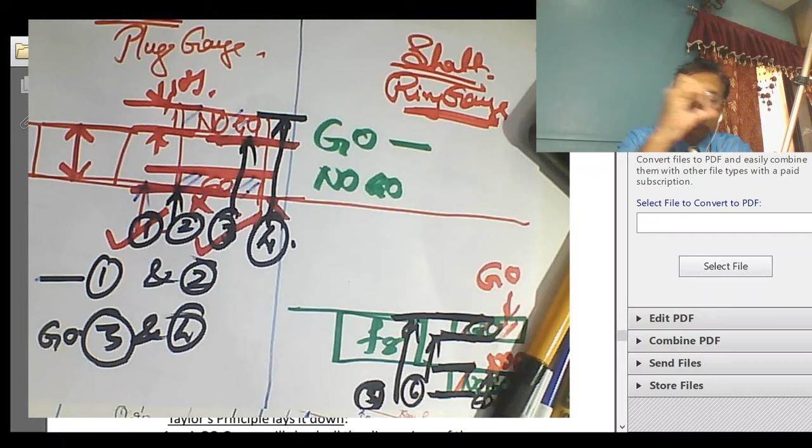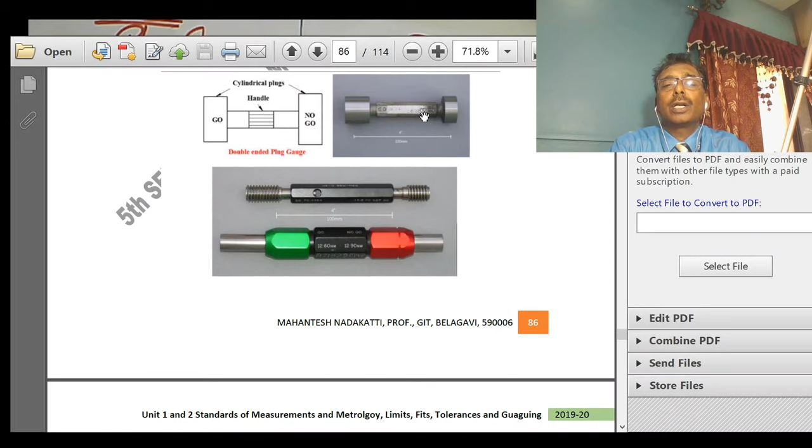This is the go thread gauge, this is the no-go thread gauge. This side is the go part. Can you see 12.6 mm? This is 12.9 mm, so this is the no-go part. It is mentioned here, if you can observe, 12.9 and go gauge. Here you can see 12, go gauge and no-go gauge, it is mentioned here.

Next, go and no-go gauge. Next, ring gauge. These ring gauges are used similarly, and you have a separate ring gauge for go. In case of plug gauges, both go and no-go can be made in a single shaft, but in case of ring gauge, for both go and no-go, you need separate gauges: one is the go ring gauge, another is the no-go ring gauge.

Fine, go through my PDF material, all these equations and materials. Now the number of students has reduced to 10, I think we will stop at this point. We will continue on Monday.